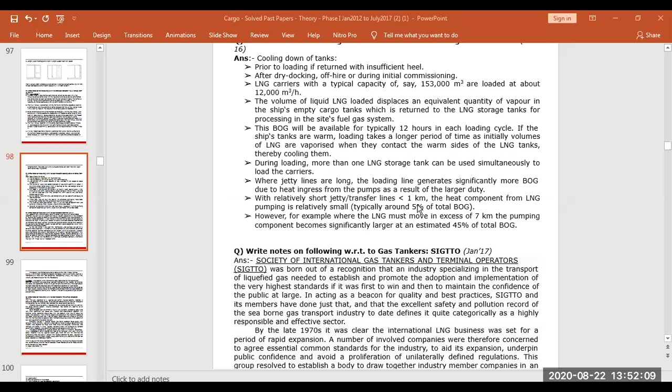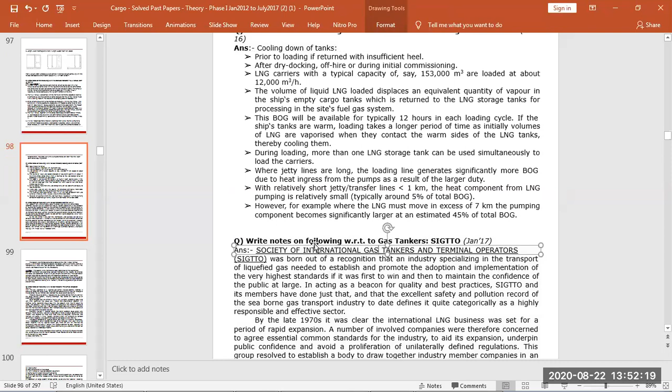So now we are going to see the questions of gas carriers. Like we can see here, write short notes on SIGTTO. So SIGTTO is the Society of International Gas Tanker and Terminal Operators. So all the gas tanker owners and gas terminal owners have formed an association for the safety of the gas industry, and

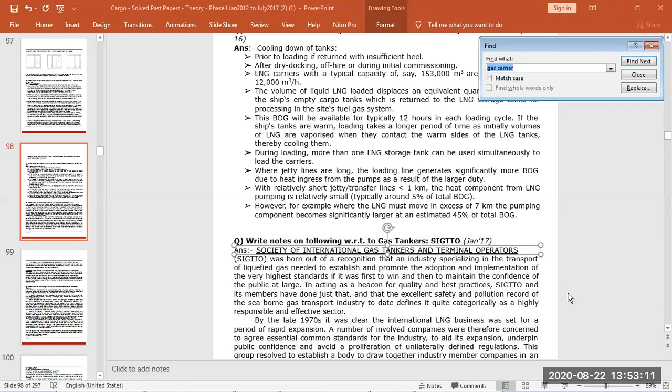they see all the hazardous operations of gas tankers, they list best practices, and they do all the research if any accident is taking place or how to keep maximum safety. And because of their good work, till now very few incidents are taking place on gas carriers. Gas itself is also quite safe, and they are classified as per IMO also, and they do information exchange all the time, technical information and experiences between the industries, and they give out all the circulars. Then we have the pre-arrival checklist we have discussed. We will see again.

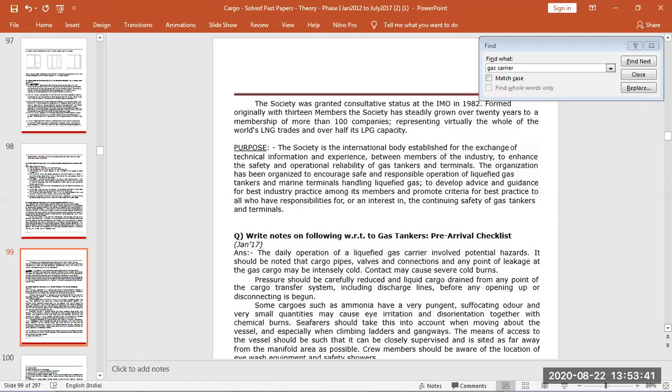So water for emergency ready, gas-free condition, alarms, gauging system, emergency shutdown, cargo operation, remote valves, transfer, emergency stops, tank high level and pressure alarms, remotely operated manifold valves, open cycle, closed cycle, functioning and advise valve type, ball valves or gate valves, and deep well cargo pumps, and general checks when you will stop the cargo and all.

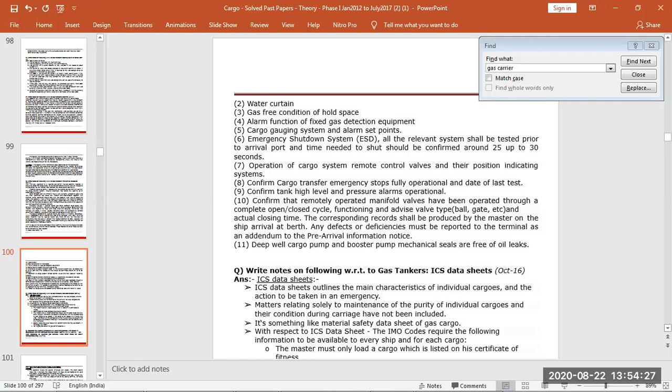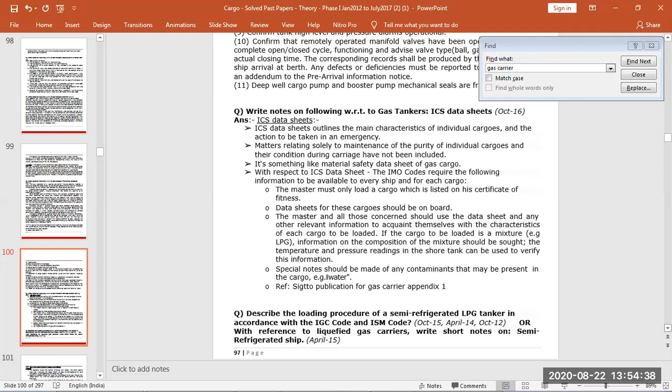Then ICS data sheet, you have to write a short note. ICS data sheets are the same as MSDS sheets, ICS for gas carriers. So it gives the properties of the cargo and emergency actions. It should be available for the cargoes loaded, especially. Then the next is loading procedure of semi-refrigerated LPG tanker as per IGC code and ISM code.

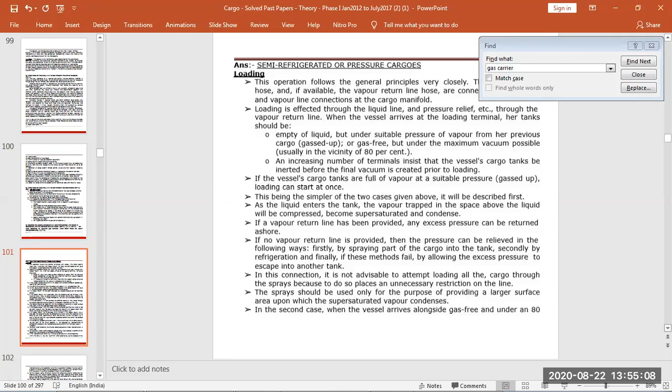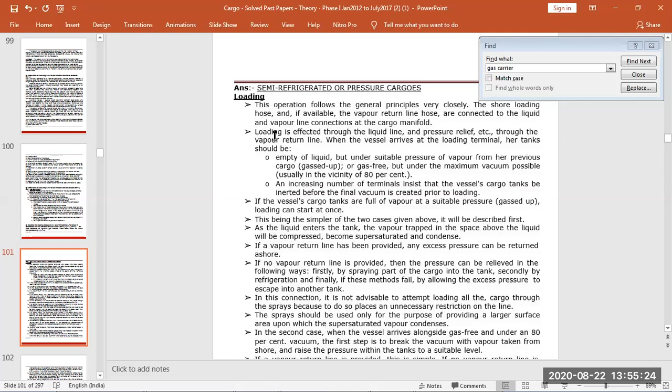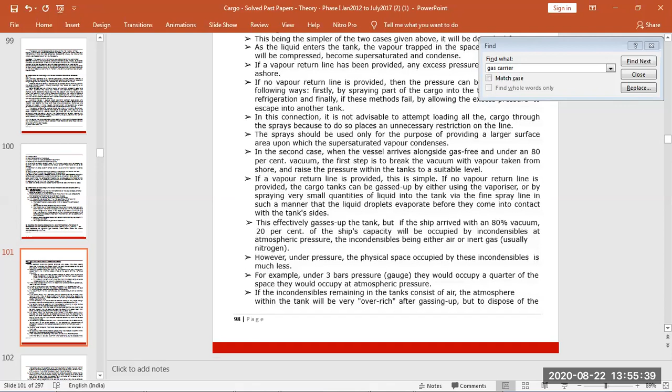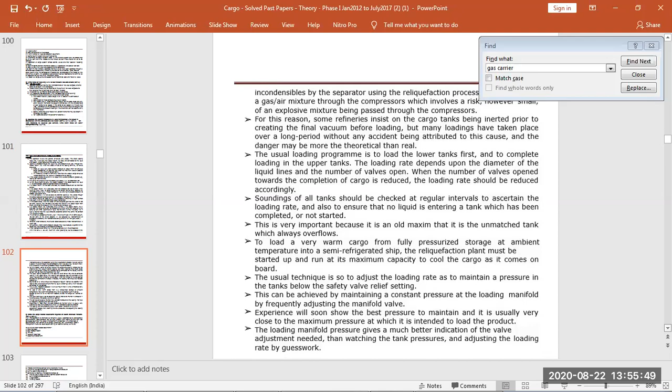So loading procedure we have already discussed, and short notes on semi-refrigerated ships. So loading procedure we do gassing up, cooling down, and then loading. So general preparation, vapor return line, we have to set the pipelines, the pumps, gassing up has to be done up to 80 to 95%. So first we'll lower the tank temperature by cooling down, then sounding, monitoring, pressure monitoring, alarms check. Then the cargo related documents on chemical tankers, so many documents, but mainly we have covered that.

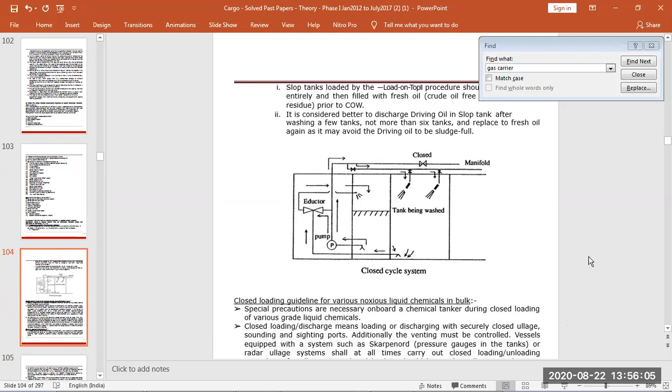Then short notes on deep well pumps. So for pumps you can write the centrifugal pump. You can draw a diagram. We have a multi-stage pump. You have to check the bearings are lubricated. The pump is never running dry, and there is no aeration, air bubbles. The motor that drives the pump is either electric or hydraulic. There is a mechanical sealing device between the motor and the discharge pipe in the cargo tank.

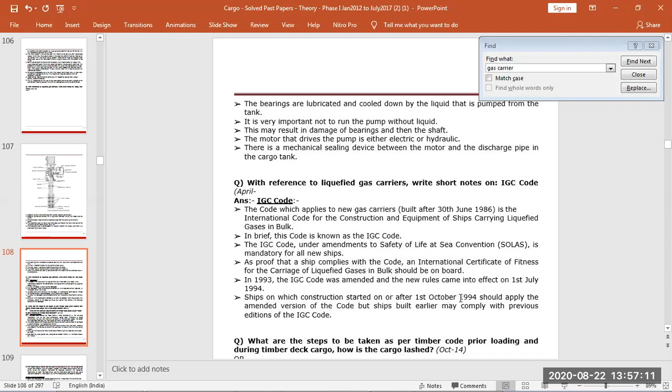Then we have to write about the IGC code, simple short note. So it is for ships built after 30th June 1986, for construction and equipment, and the IGC code for safety of lives is mandatory under SOLAS amendments, and the certificate of fitness is there on board, with the list of cargoes and all the properties and precautions and extra things required.

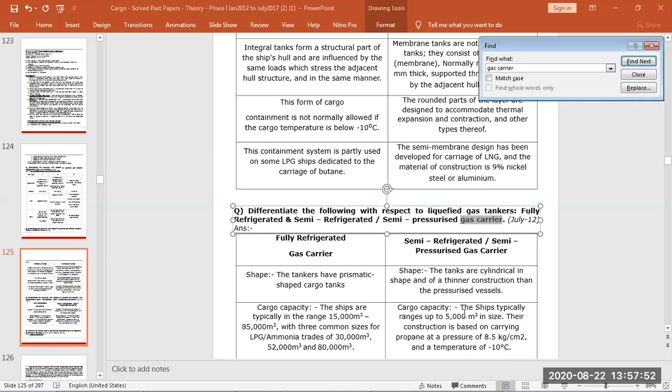Then differentiate between fully refrigerated, semi-refrigerated, and semi-pressurized ship. So fully refrigerated gas carriers have prismatic shaped tanks. Semi-refrigerated are cylindrical with thinner constructions. Then cargo capacity of fully refrigerated is a very high range, like 15,000 to 85,000 as we saw for LPG, commonly 30, 50 and 80. Here the pressure vessels are smaller because of thickness, so 5,000 cubic meters and high pressure. Then

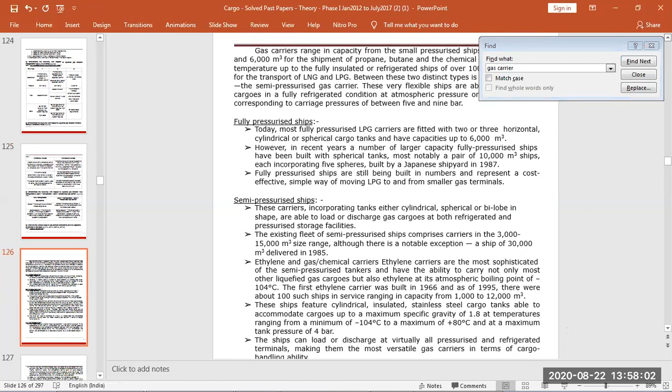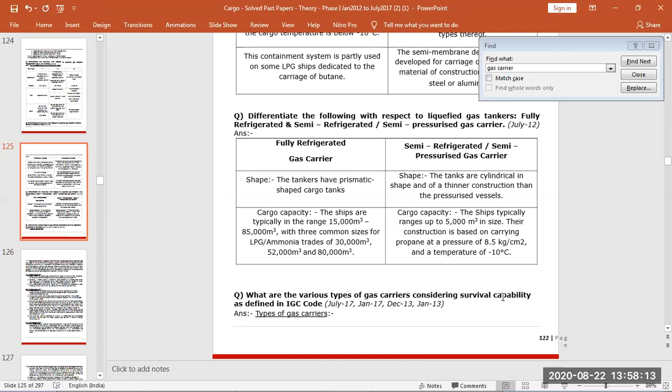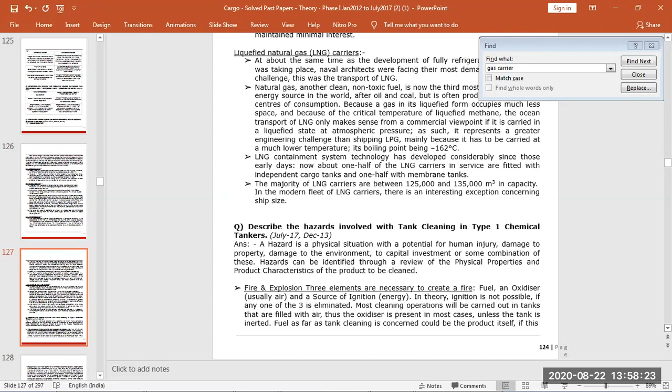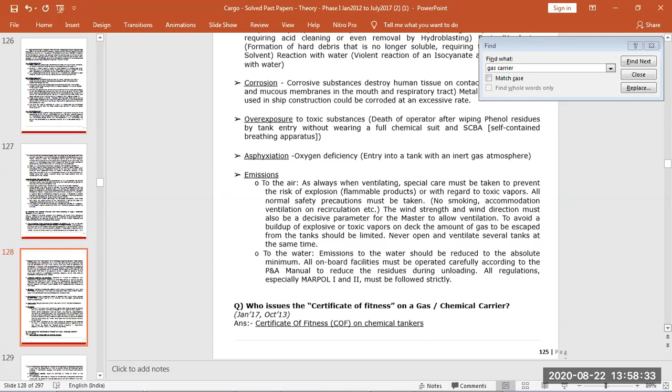details of types of gas carrier considering survival. As per survival capability, this is mostly asked, types of gas carrier. So you have fully refrigerated, semi-pressurized, fully pressurized, and LNG. And hazards involved with type 1, similar hazards, fire, polymerization, corrosion. Certificate of fitness of gas carrier is the same. It is given by the flag state or on its behalf by class with validity of 5 years as per IGC code.

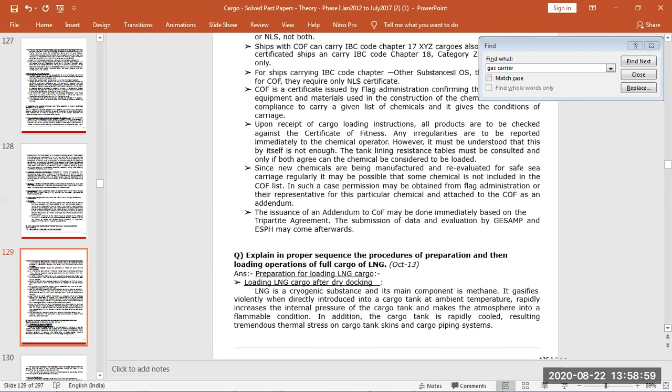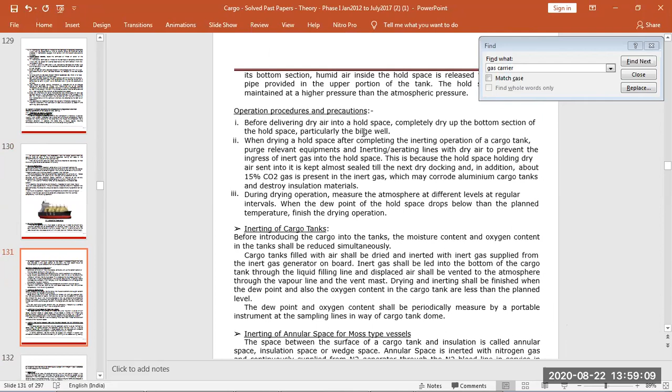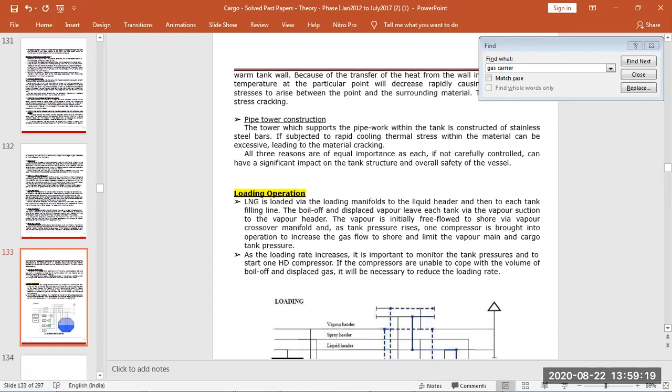Then proper sequence and procedure for preparation and loading of LNG. So after dry docking, we do inerting, gassing up, drying and cooling, and then loading. So operation procedures: ship shore safety check, inerting, then gassing up and cool down, then loading. Bulk loading, then topping off and deballasting at the same time, filling rates, behavior

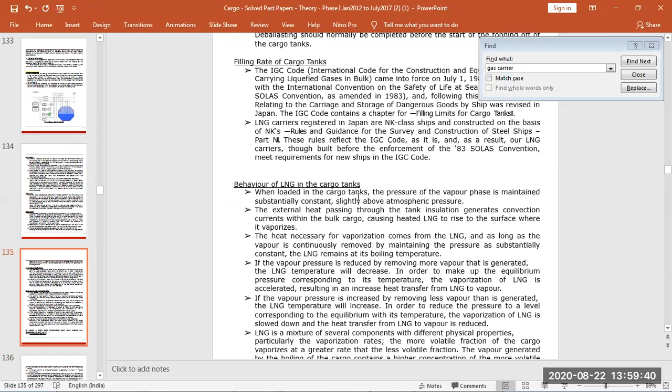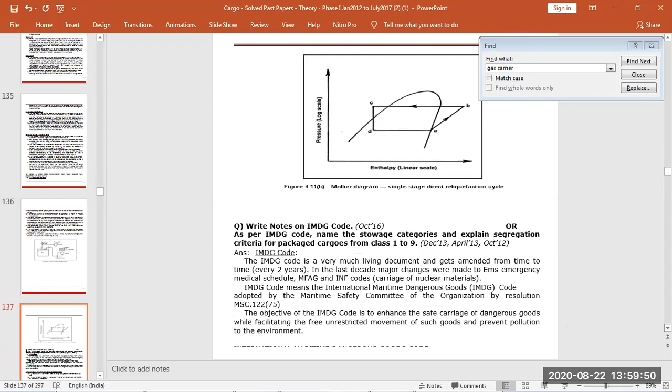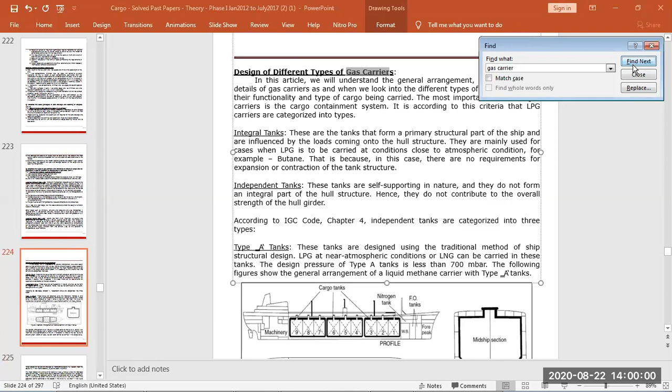of LNG. When LNG is loaded, the pressure of the vapor phase is maintained substantially constant, slightly above atmospheric pressure. So we are controlling the pressure with the temperature to maintain a constant pressure. Then reliquefaction plant, single stage we have done. Types of gas carriers, designs of gas carriers, tanks we have done, integral tanks, independent tanks. And that's it.